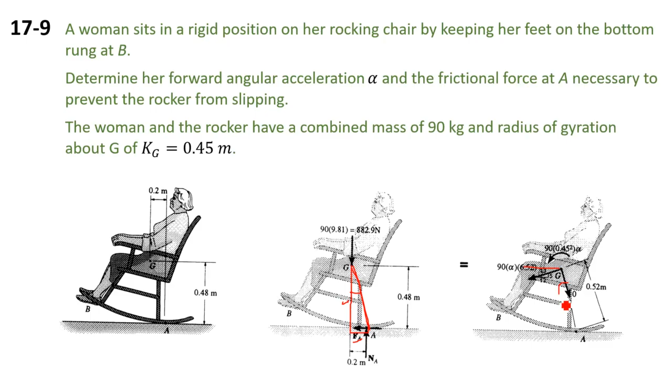Okay, now once again, we are going to have a triangle like that. Okay, so this is the rGA. We know this value, so we can find the angle here. We're going to use that to analyze this acceleration in two components. The normal acceleration is going to be 0 because the omega is equal to 0.

So after sketching the free body diagram, we're going to find the sigma of the forces in the free body diagram to the x-axis, which is going to be equal to the sigma of the forces to the kinetic diagram, which is going to be the mass multiplied by the aGx. And then for the y direction, the same thing in the free body diagram. We have the vertical forces here, which is going to be equal to the mass multiplied by the aG to

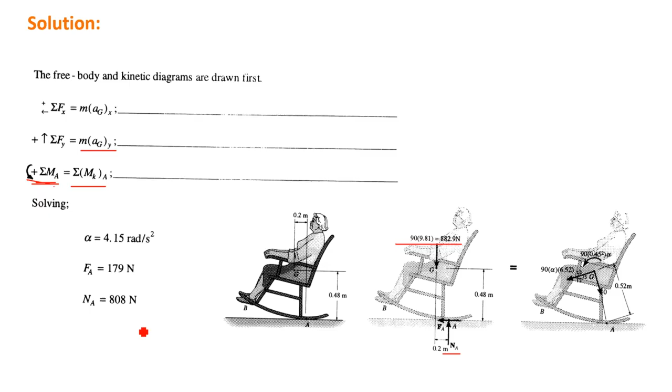the y direction. And finally, for the moments in the free body diagram about the point A is going to be equal to the moments around the point A in the kinetic diagram. And by solving, we will find the alpha, the FA, and the NA. So these are the figures we should get. And let's see how we get them.

So first, we're going to define that the bottom rung is going to be on the arc as a section of the large circle. So the problem can be treated as a rolling motion without slip.

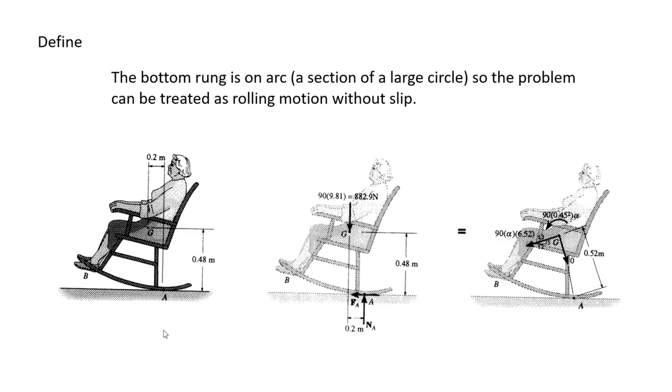So this is more detailed drawings for the free body diagram. That's the arc. Okay, we have the arc here. That's the point A, friction force, normal force, the weight going downward, and the distance RAG can be found here by solving for this triangle. The weight is going downward at the point G.

For the kinetic diagram, at the point G, we're going to have two components for the force, which are the mass multiplied by the acceleration aG in the x direction, and the mass multiplied by the acceleration aG in the y direction. And we have IG multiplied by alpha for the moment. And we can keep solving for that.

So the known values we have: the mass is 90 kilograms, kG is 0.45 meters, the omega is 0 radians per second, and the unknowns are the force A on the x-axis, the friction force, the normal force at A, and the alpha value.

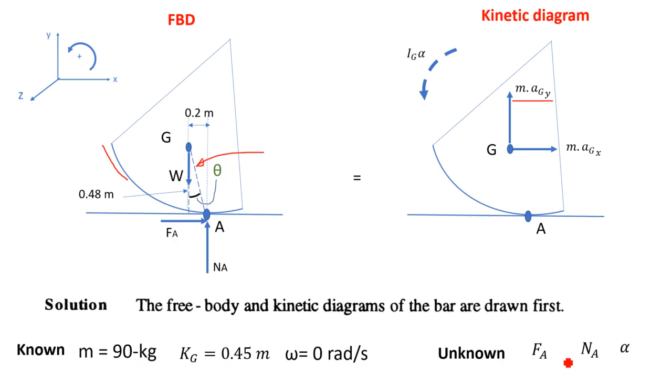So we are going to start the solution. These are the set of equations we're going to have. The sigma of the forces in the free body diagram in the x-axis is equal to the mass multiplied by the acceleration in the x direction. For the y, the same thing, the mass multiplied by the acceleration in the y direction. And the sigma of the moments around the point A is equal to IG alpha plus the mass multiplied by aG tangential multiplied by rG/A, from G to A.

Now we start the solution by calculating IG, which is equal to the mass multiplied by kG squared. kG was 0.45, so 0.45 squared multiplied by 90, and this equals 18.225 kilogram meter squared. Now the distance from G to A can be calculated using the trigonometry of the right angle triangle, and it's equal to 0.2 squared, which is the distance along the x-axis, plus the distance along the y-axis squared, all under square root. Solving that, we find the answer is 0.52 meter, the distance between here and here.

Okay, so now we go to the next point, calculating the accelerations. The first acceleration is the normal acceleration along GA, which is equal to 0 because it equals omega squared multiplied by rGA. rGA is 0.52, but omega is 0, so this gives us 0. The tangential one is equal to alpha multiplied by rGA. rGA is 0.52, alpha is unknown, so we keep it like that. We assume that alpha is positive, so aGt should be positive as well.

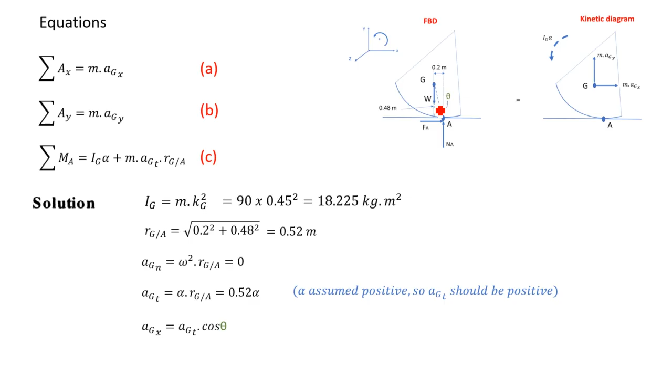Now for this acceleration, we can take it to the x direction and the y direction. To the x direction it's multiplied by the cosine of theta. You know actually where theta is, let me clean the image so it's more clear. So the angle we're talking about is here. Now that's the acceleration we got, and the angle is also here. To take it to the x-axis, we multiply by the cosine of theta. To take it to the y-axis, we multiply by the sine of theta. So these are the two equations we're going to have, and we get the accelerations in the x direction and the y direction.

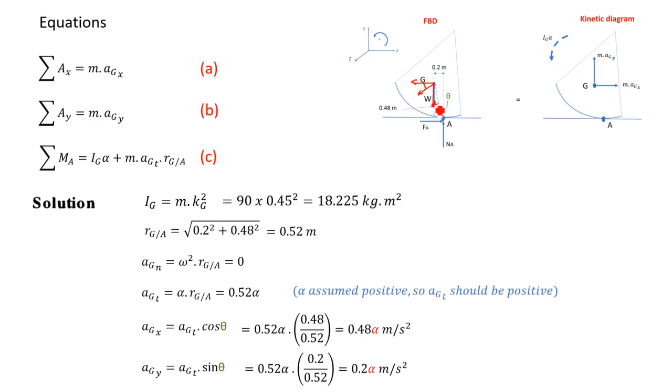This should be negative because they're going to the left and going downward. Now we start to do the calculation for the forces to the x-axis. So the friction force at A is going to be equal to the mass multiplied by the acceleration at the point G to the x direction. Or I can say that FA is equal to 90 times negative 0.48 alpha. Now we said it's negative because it's going to the left acceleration.

Okay, so that direction is not the most accurate one here, and actually those should be going to the other side. You can tell that because the acceleration is going to that direction because the whole thing is rotating to that direction. So we will find that the force A is going to be equal to negative 43.2 alpha N. We don't know what the alpha is yet, so I need to solve for the alpha to find the friction force.

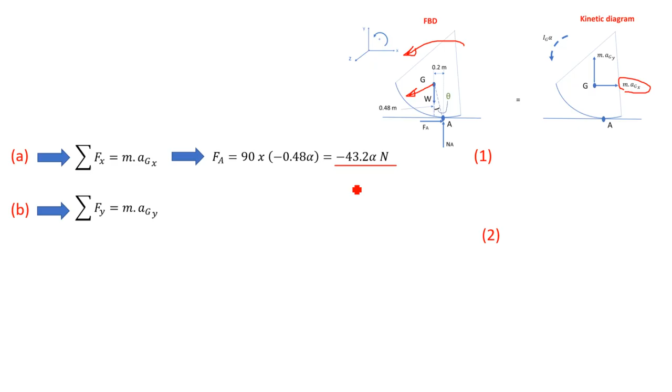If I'm going to do the calculation of the forces to the y direction, I'm going to come out with the same result, but now in the y direction we have the normal force at A, positive, and the W is negative. On the kinetic diagram, I have the mass multiplied by the acceleration Gy. Remember that once again, this is a negative value. So we can write down the equation like that.

We can put the parameters that we know in, and we are going to solve for that, and we will find the relation between NA as a function of alpha, and this will be equal to 882.9 minus 18 alpha. Okay, so what we've done is simply that the value we have here should get the negative sign, and this value will move to the other side. It will get a positive sign, so it's going to be 882.9 minus 18 alpha, and this will be equation 2. So still I don't have the alpha.

Now let's go to another relation that provides me the value for the alpha, which is going to be the moment around the point A. Actually, it's going to be a nice idea to clear the screen. Now, if I'm going to do the moment around the point A, first on the free body diagram, FA and NA don't have any effect on the moment at this point. But the W is going to create a counterclockwise moment by multiplying W by the distance of 0.2.